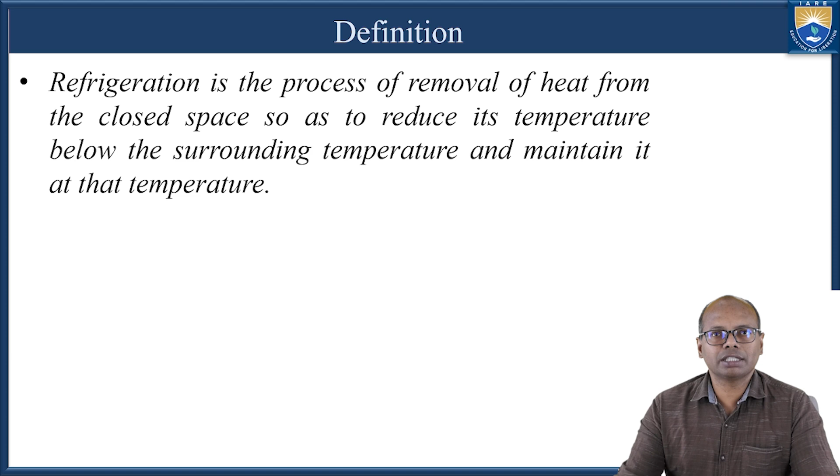Now, coming to the definition of refrigeration, what is refrigeration? It is the process of removing heat from a confined space so that the temperature in the confined space is maintained less than the atmospheric or surrounding temperatures, as well as to maintain it at that same temperature. So that is the definition of refrigeration.

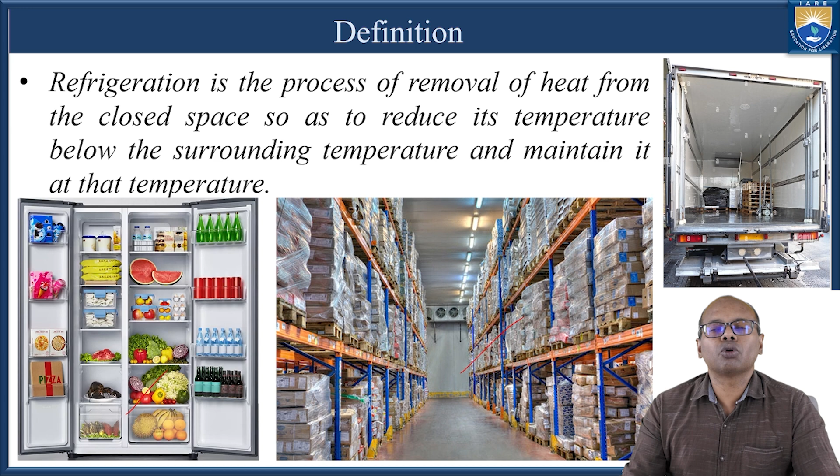These are a few applications of refrigeration. This is a confined space inside the truck, this is the confined space inside a storage room, and this is the confined space in a refrigerator. From these examples, you can understand the application of refrigeration: to maintain food materials at lower temperatures and to transport food materials from one place to another. The storage can be a huge storage plant, or it can be a refrigerator for domestic purpose. In this way, refrigeration plays a vital role in modern human society.

Now, coming to refrigeration, where it started in the early 1800s. In the early 1800s, in the US, they started harvesting ice. Harvesting ice means...

During winter seasons, the temperatures will be very low, so that the top surface of the river will be covered with ice. What they would do is cut the ice into pieces and transport those pieces to storage rooms, and this ice storage would last throughout the year. They constructed big storage places where they could maintain this ice throughout the year, and then they would transport this ice to the places where it was required to preserve food materials. So this is the starting point of the modern way of using ice for preservation of foods.

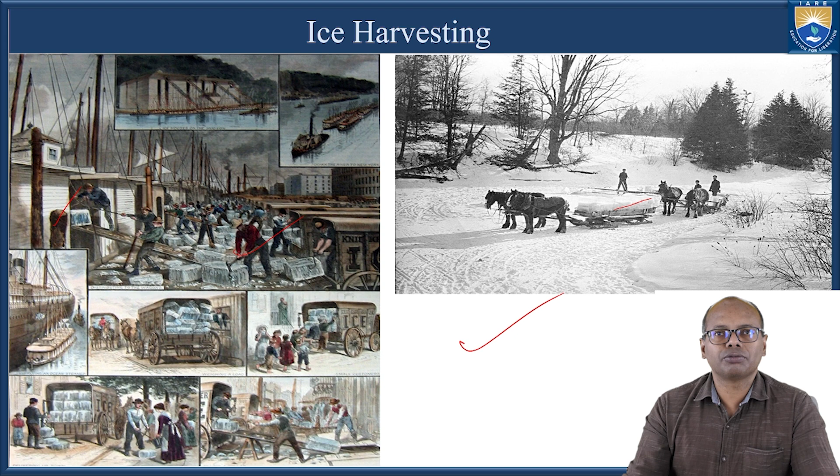Now, coming to mechanical refrigeration systems, we have three types of refrigeration systems: non-cyclic refrigeration systems, cyclic refrigeration systems, and other modern refrigeration systems.

In non-cyclic refrigeration systems, we have refrigeration by ice, refrigeration by evaporation, and refrigeration by dry ice. In cyclic refrigeration, we have the air refrigeration cycle, vapor compression refrigeration cycle, and vapor absorption refrigeration cycle. In other refrigeration systems, we have thermoelectric refrigeration, steam jet refrigeration, vortex tube refrigeration, and so on. We'll confine our discussion to these nine processes, but recently there are many other refrigeration systems, like magnetic refrigeration systems and so on.

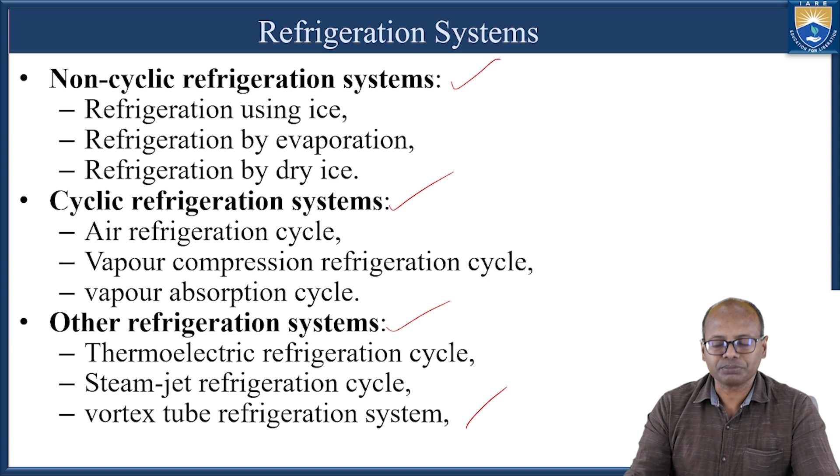Coming to non-cyclic refrigeration systems, the first one is ice refrigeration. How does this ice refrigeration happen? As we have seen in the previous slide on ice harvesting...

For this ice refrigeration, what we can do is keep the ice in this tray. As we all know, the latent heat of ice is very high, it is 335 kilojoules per kg.

Now, with this latent heat, if I keep the ice there, what happens? It will take heat from the surroundings, and because the surrounding temperatures are higher than the ice temperature, it will try to melt.

In the process, because the ice is taking heat from the surroundings, the surrounding air will get cooled. As the air gets cooled, its density becomes high, so it will go down through these storage materials, and this cold air replaces the hot air inside the storage place.

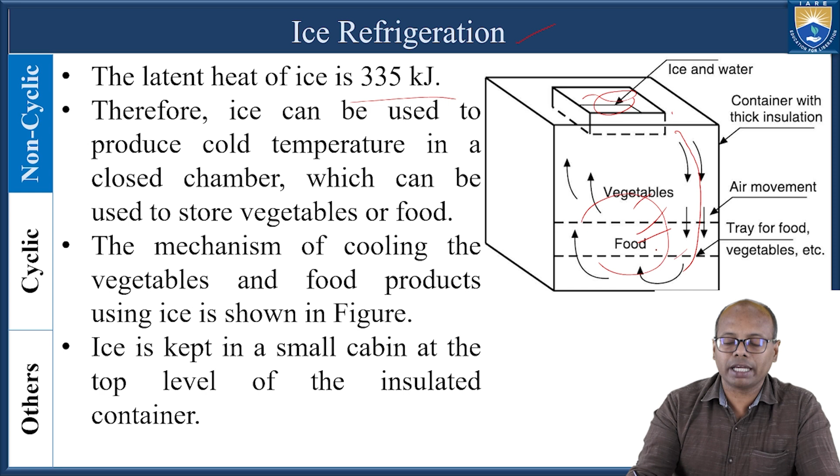Now this hot air, because it is lighter than the cold air, will go up. In this way, it will create convection currents: the heavier cold air comes down and the lighter hot air goes up. This is called the convection currents.

Because of these convection currents, the food materials here will be preserved, kept fresh at lower temperatures for a longer time. This cooling process will continue until the ice in the tray melts completely. When the ice completely melts, we have to replace that water and place ice again. So this is the ice refrigeration process.

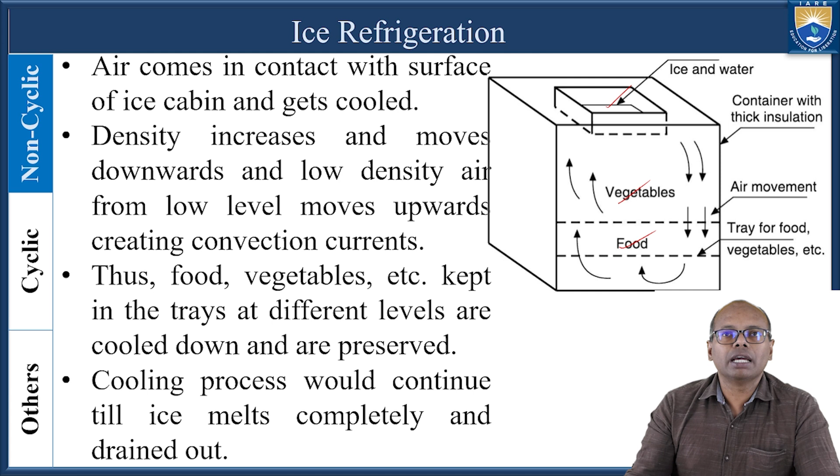Next one is evaporative refrigeration process. This is a very olden refrigeration process, rather it is a natural process that happens.

From the very olden days in India, they use earthen pots. In the earthen pots, there will be some very minute holes which cannot be seen by the naked eye. Through these porous holes, the water will try to come out. The surface of the liquid inside will take heat from the surroundings as well as from the water, and this fine layer will get evaporated. When this happens, the temperature inside the pot will go down, and the surrounding temperature also will go down, and this liquid layer will get evaporated.

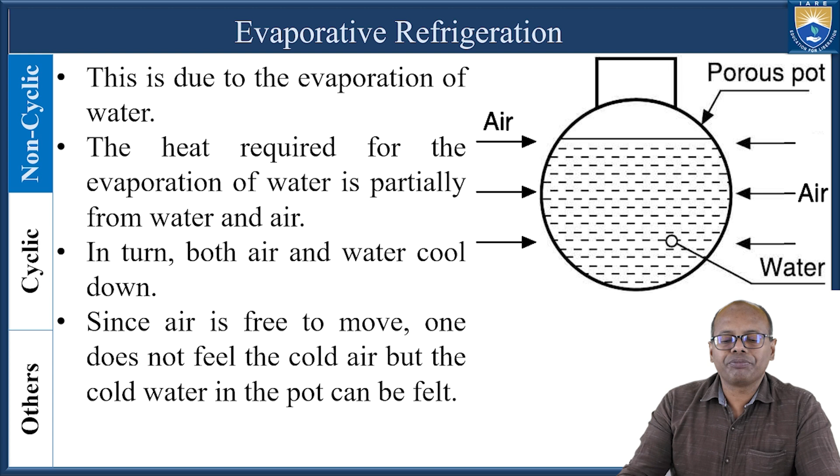So this is a natural process that has been used from very olden days, and this is called the evaporative refrigeration process. Here, the heat removed from the evaporation of water is partially from air and partially from water, that we have to remember. The water inside the pot will give some heat, and the surrounding air also will give some heat, and because of that, the surface water will get evaporated.

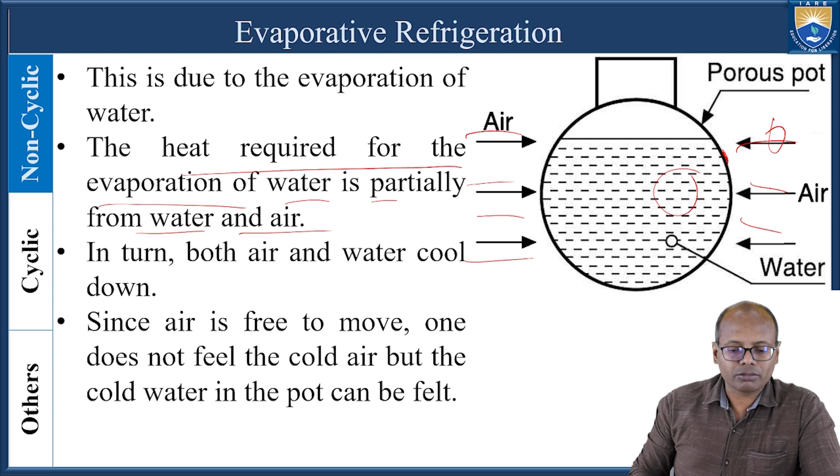For this process to run properly and cool effectively, the air breeze should be there continuously. That means the pot should be exposed to air which is moving, not stagnant. If air is moving freely, the water inside the pot can be cooled continuously. There are many other applications where we can see this evaporative refrigeration.

The evaporative refrigeration can give temperatures 5 to 15 degrees less than the surrounding temperature.

Some other examples of evaporative refrigeration happen with flowing water. In a river, the top layer will get evaporated, and the air will give some heat, and the water below will give some heat. Because of that, the top surface evaporates, and as the air moves over the river, we can feel the cool breeze near lakes, rivers, etc. The water inside the river will become cooler than the surrounding temperature, as well as we get the cool breeze from the water bodies.

Our human bodies have sweat pores, and as the body feels the temperature is a little higher, it will eject some sweat, and the surface of the sweat will get evaporated. In the process, the body will get cool, becoming a little colder than what it should be.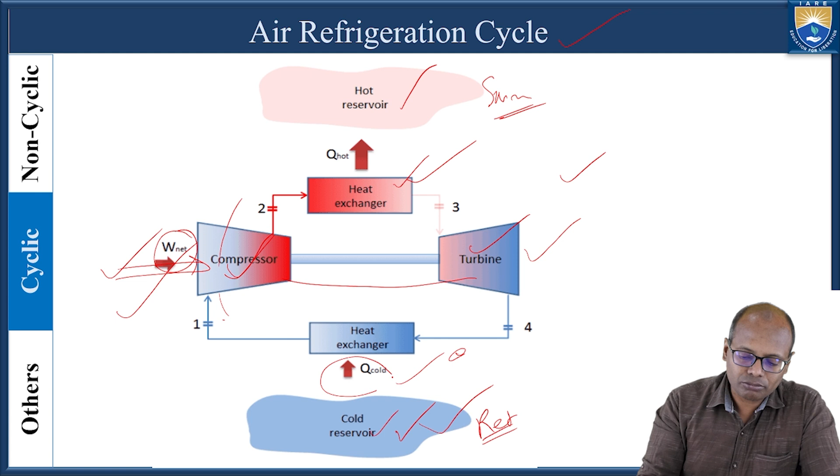With this net work, heat is taken from the cold atmosphere or cold storage place and given to the hot surroundings. The cold places are maintained at lower temperatures than the surrounding temperature, and this can be a continuous process. As long as work is supplied, the temperature here stays low and heat is rejected to the surroundings.

One advantage here is you can define the pressure — to what extent you want to compress the air and to what extent you want to expand it inside the turbine. So we can adjust the compression and expansion pressures of the compressor and turbine, and with that we can regulate how much heat is extracted from the cold reservoir and how much heat is supplied to the hot reservoir. This is one advantage of this cyclic process — we can control the temperature of the cold storage place by controlling the compressor and turbine pressure.

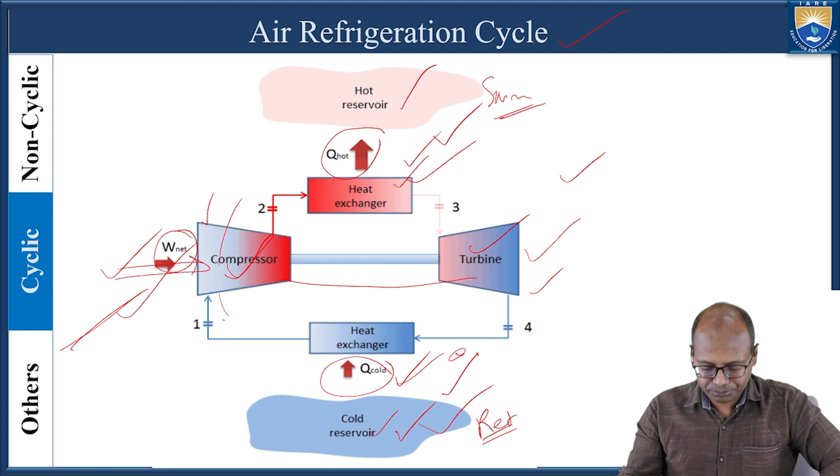Now the next one is the vapor compression refrigeration cycle. This is another cyclic process. In this, we are replacing the turbine with an expansion valve, and we are supplying the entire work to the compressor. Previously, part of the work was supplied by the turbine, but here the entire work is supplied to the compressor.

So one can ask, why are we going for this setup? There the turbine gives some work, but here no work is supplied by the expansion valve. Why do we have to go for this kind of setup?

Now here, if you see, the working media is a fluid — the liquid is the working fluid here. What happens is the liquid and traces of vapor get evaporated in the evaporator, and here low pressure liquid will be present. When the pressure is very low, the boiling point will also be very low. As the liquid pressure goes down, the boiling point of the liquid goes down, and because of that it takes heat from the cold storage place and gets evaporated.

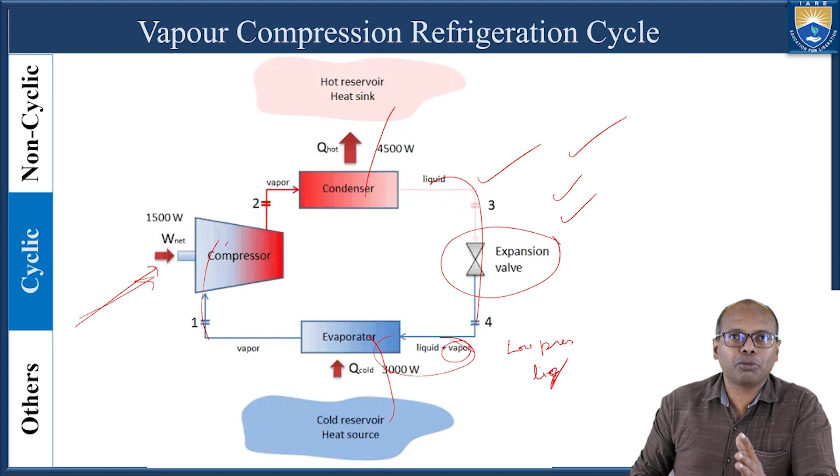So the next one is vapor absorption refrigeration cycle. In vapor absorption refrigeration cycle, the compressor is replaced by a component called thermal compressor. This entire part is doing the work of the mechanical compressor that we have seen in the vapor compression refrigeration cycle.

Remaining parts are the same. This is the condenser, where the heat is rejected to the surroundings, and this is the evaporator, where the heat is taken from the cold storage place, and this expansion valve in which the temperature, the pressure of the liquid is reduced.

Okay, so this is the layout of the vapor absorption refrigeration cycle. And what is this thermal compressor? So here inside this thermal compressor we are using another liquid, so to get this compression happens.

So how this happens, here we can see. Now here the expansion valve is there, and here we are having a pump. Instead of there, we are compressing the vapor. Now here what we are doing, we are pumping only liquid, and here this is a generator and this is absorber. Now what is this generator and absorber?

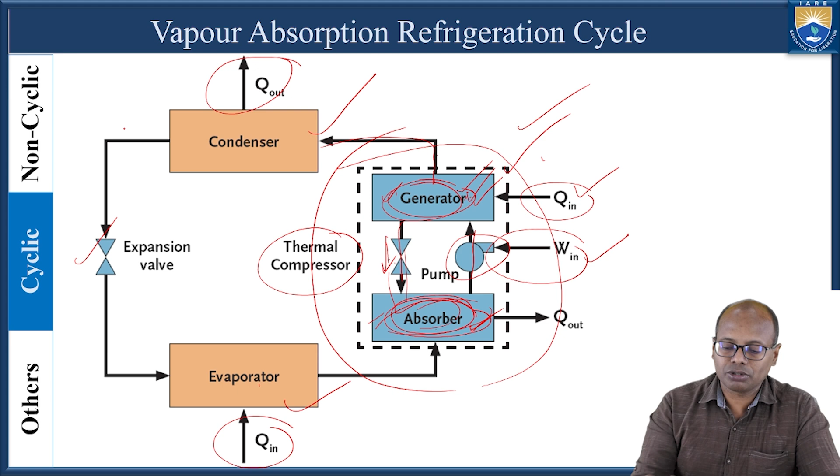In that way what will happen is it will maintain the storage room at lower temperatures, less than the temperature of the surroundings. So here what is happening is we are supplying less work. Instead of less work, along with less work, what we are doing is we are heating this generator. So in this liquid combination, one liquid will have higher boiling point, the other will have lesser boiling point, and the lesser boiling point liquid will be the refrigerant, and the higher boiling point will be the absorbing liquid. So the lesser boiling point refrigerant will get evaporated in the generator as we supply heat, and it will go to the condenser. So in this way this thermal compressor works.

Now coming to the modern refrigeration techniques, one is the steam jet refrigeration cycle. So the steam jet refrigeration, not cycle, it is a refrigeration system, the steam jet refrigeration system. So here also it is a continuous process, but it is not a cyclic process. Okay, so what is happening here we have to see.

Now here this is boiler, and the steam is expanded through this nozzle. So when the water is expanded through this nozzle, what happens is the velocity will be very high. So this high velocity vapor, what it will do is it will go through this convergent divergent section called ejector, and along with that it will take some vapor from this flash chamber.

Here, since the high velocity fluid is going, some vacuum will be formed, and because of that vacuum the water on top will become vapor. It will go through this ejector and get condensed into this chamber. So here we are using only water.

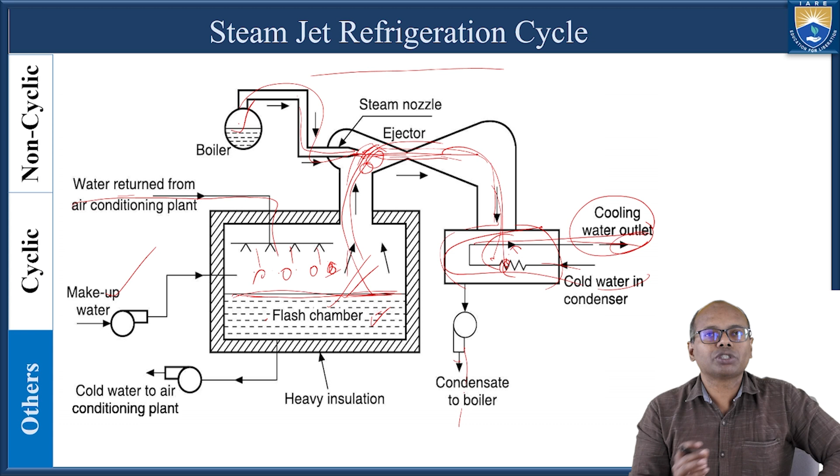The other cycle happening here is: from the boiler, hot steam is supplied through the nozzle, and this high velocity steam takes the vapor with it. Here it gets condensed into liquid, and again this liquid is supplied to the boiler. So this is another cycle that is happening. So here two cycles are there in this steam jet refrigeration cycle.

So next one is thermoelectric refrigeration. Now what is this thermoelectric refrigeration? We have something called the Seebeck effect. So what is this Seebeck effect?

If two ends of a junction - we have two different conductors forming a junction, this is one conductor and this is another conductor, now these two conductors are forming a junction. This is one junction, and this is another junction, formed by these two different conductors.

If these junctions are maintained at different temperatures, say this is high temperature and this is low temperature, because of that temperature difference, some EMF will be generated inside the circuit. The EMF is generated because of maintaining the junctions of two dissimilar conductors at two different temperatures. So some EMF is generated - that is called the Seebeck effect.

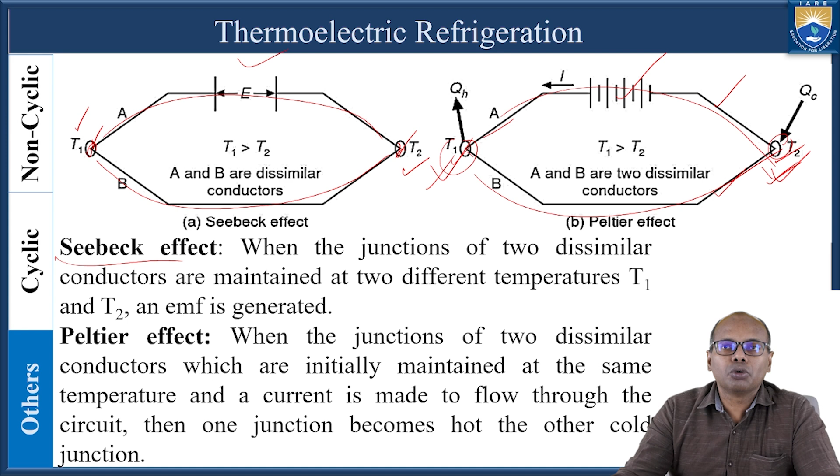So this is the thermoelectric refrigeration system. We are using some electrical energy. Say batteries are supplying electric current through two conductors with different conductivities. As the conductivities are different and electricity is supplied through one conductor, one junction becomes the colder junction and the other, towards which the current is passing, becomes the hotter junction. So here we can heat things, and here we can cool things. So both things are attained, one place we can heat and the other place we can cool using this thermoelectric refrigeration system.

So the next one is vortex tube refrigeration. Here the high pressure or compressed air is supplied through the nozzle in such a manner that it causes a spiral kind of flow. Now this compressed air is a little hotter. It forms a spiral and goes through this nozzle, where the temperature is a little higher. If I freely allow it, it will go directly through.

If I restrict the flow such that some part of this hot air leaves this space, it will cause a central core that is a cold temperature region. The hotter air goes in the spiral, and we restrict the flow, meaning we don't allow the hot air to come out directly. Because of this restriction, the pressure here is high and there it is low, so from high pressure to low pressure a reversal flow takes place, and this reversal spiral gives super cooled air coming out of the vortex tube. This vortex tube can give a localized cooling effect, and since the heat is taken by the hot air, we get a hotter temperature on that side. So one side we get hot air and the other side we get cold air.

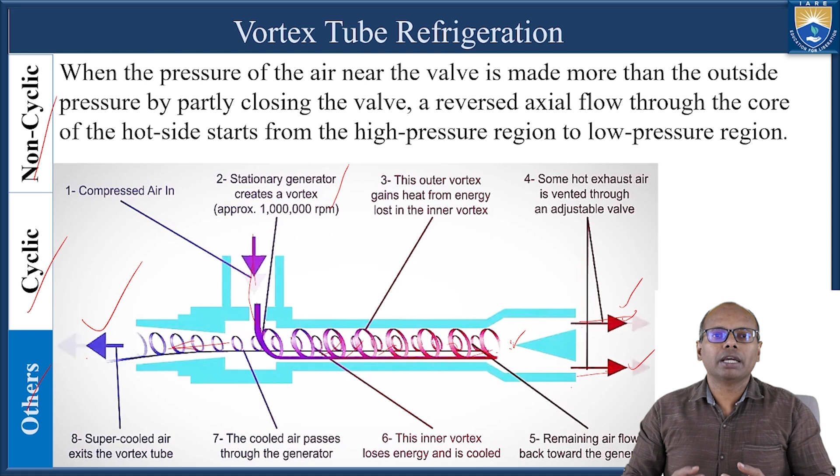Okay, so this is about the introduction to refrigeration. We'll see further in further classes.